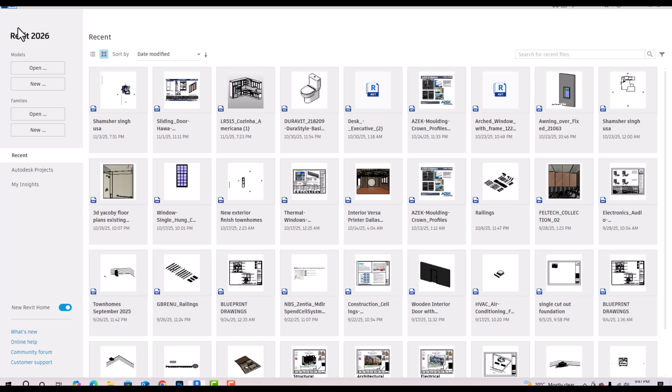So I'm going to families here and you can click open, and I'm going to select English Imperial since I'm using feet and inches. If you are using meters, you can go for English metric. So I'm going to furniture category here, and I'm going to select furniture.rft. I'm going to open this.

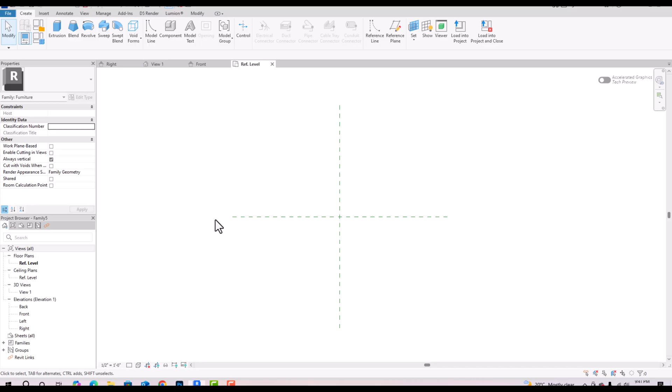This is the floor plan reference level. I need to create a reference plane here, so I'm going to select this, or you can type shortcut command RP. And now I'm going to draw another line here. So this is 2 feet 2 inches, so I'm going to make this as 2 feet. Draw a reference line here and another reference line here.

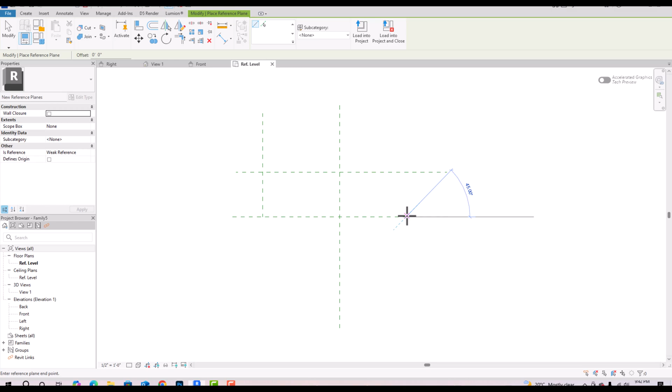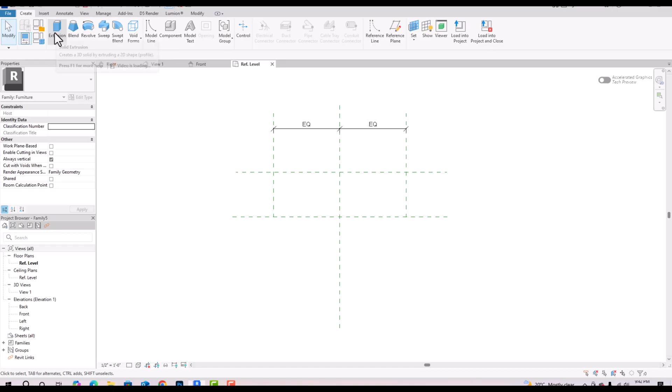So you can take a measurement here, so you can use the annotate tab here, and I'm going to select this one and this one. And I'm going to make this as equal, so these all are equal here. So now this is our reference plane, and I'm going to create an extrusion. So I'm going to click on this extrusion, and I'm going to draw a base here.

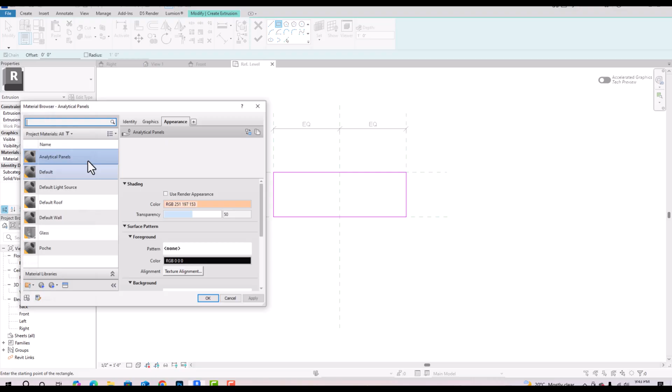So you can see this is our extrusion height, and I'm going to make this as, suppose, 7 feet here, and material you can change here. So it is recommended you create a material for this, and I'm going to create a default new material, rename this as wood finish.

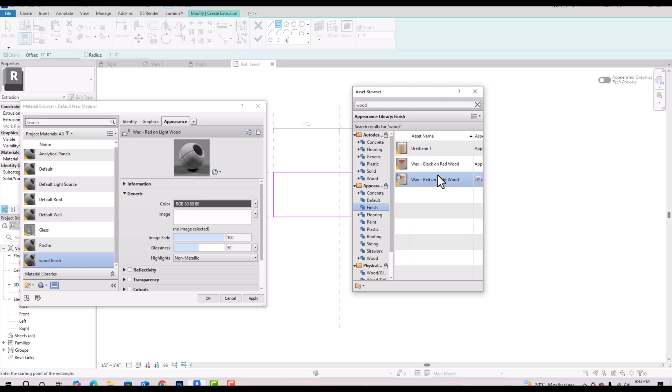So we can use any material here. So I'm going to give this as a wood finish, so we can select any wood here. So I'm going to select this finish here, and I'm going to select this wax light wood, and I'm going to apply OK. And now I can finish this here, and I'm going to front here.

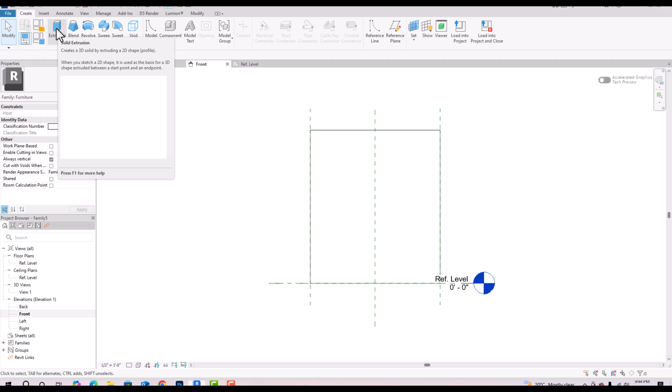So this is our wardrobe here, and now I'm going to draw another extrusion here to create doors. So this is another door frame. So I'm going to create extrusion, and now you can select this extrusion here, and you can use a rectangle here, and you can draw some extrusion here.

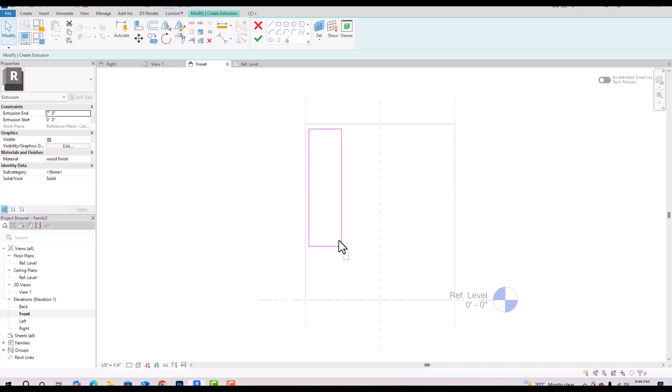This is just to make you understand. So I want to create 2 frames here, and can take this as 1 feet 4, and you can copy this here. So now I want to make a glass, so I'm going to finish this, and you can make this as 1 inch.

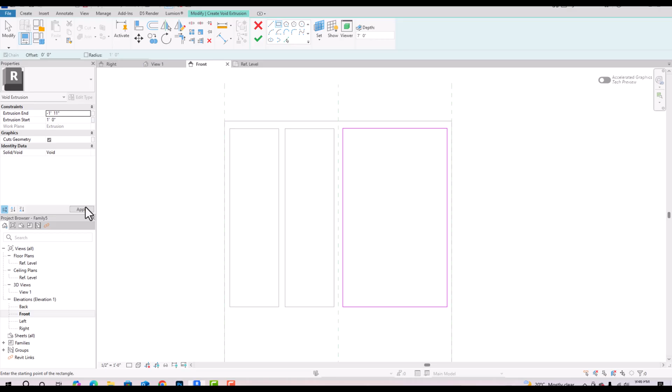And now I'm going to create void forms, void by extrusion, and now can select a plane here, and now I'm going to select void by extrusion. So I'm going to take this as 1 inch 1 feet, and I'm going to take this as minus 1 feet 11, void, apply, finish this.

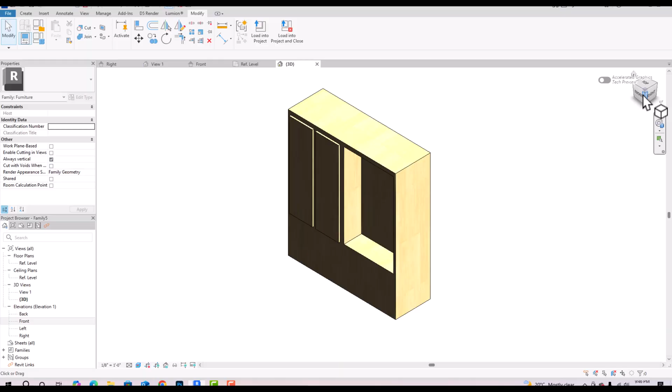And can use cut geometry tool here, cut geometry. So I'm going to select this one, and now I'm going to select this one, and we'll see in 3D. So this is the extrusion we have created. So now you can create a glass material here.

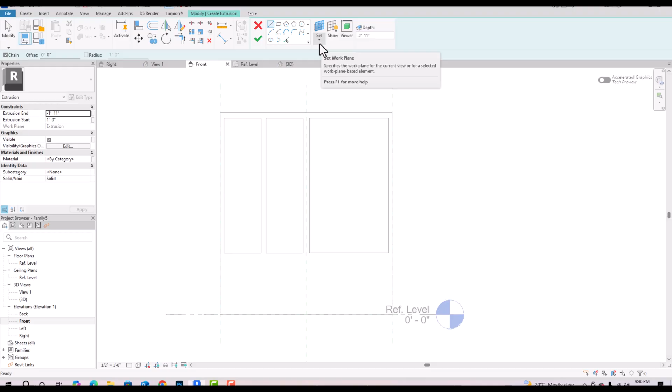So I'm going to my front here, and now I'm going to create another extrusion here, and I'm going to pick a plane here, and I'm going to pick up this plane, and I'm going to create a glass here. So now I'm going to use this as 0, and I'm going to give the glass thickness as minus 1/8 inches, suppose. And you can also change the material here.

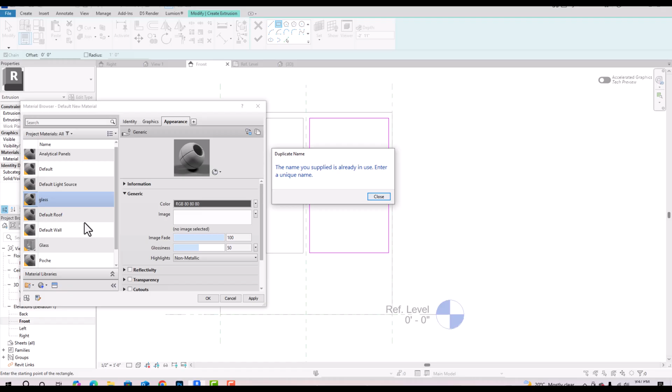So I'm going to create a new material here, and I'm going to rename this as glass, and it already exists, so then I'm going to rename this glass 1, and I'm going to search for glass material here.

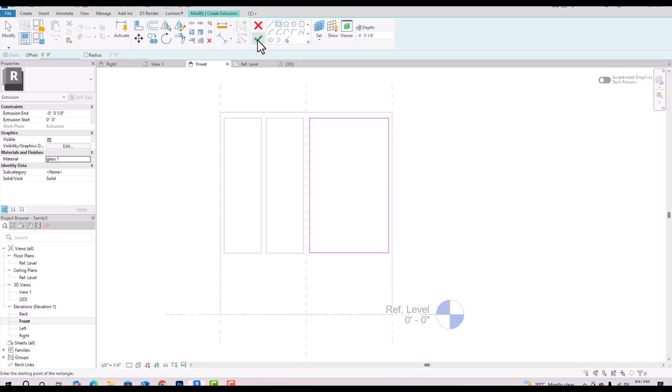So I'm going to select this blue glazing, and I will click apply, OK, and now we can apply this material here, and we'll see in 3D view. So this is our glass frame. So this is created here.

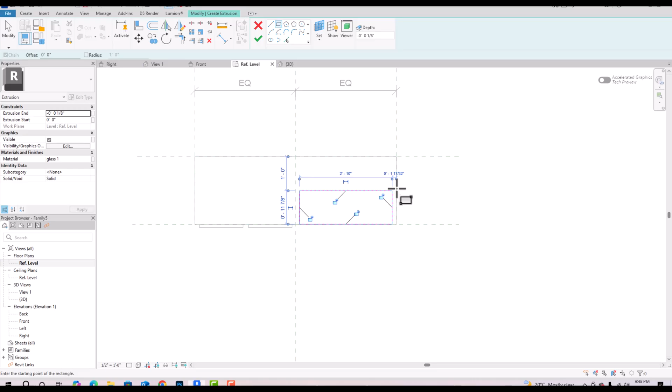So I want to create some racks. So now what I will do, I will go to my reference level here, and in this I'm going to create a rack here. So I'm going to select this, and I'm going to draw to the width of this glass opening here. So now what I will do, I will just give a thickness of 1/8 inches. So I will start extrusion from 3 feet 6 inches.

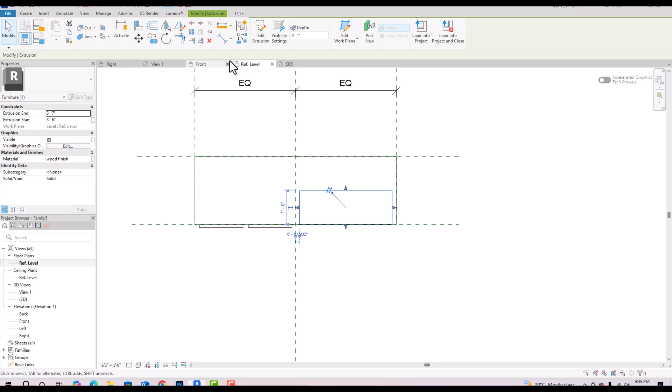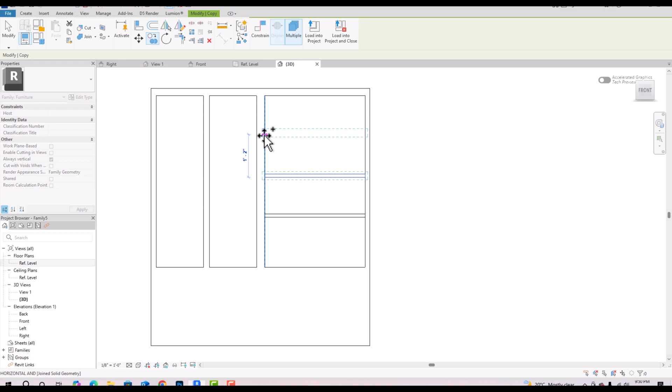This is 3 inches. So I'm going to make this as 3 feet 7. Apply. Then again you can check here. So now this is okay, and you have to select wireframe here. So I'm going to front mode here, and I will keep copying here. So I will remove this constraint, and we'll make some racks here. So we can make them equal size or depending on your design.

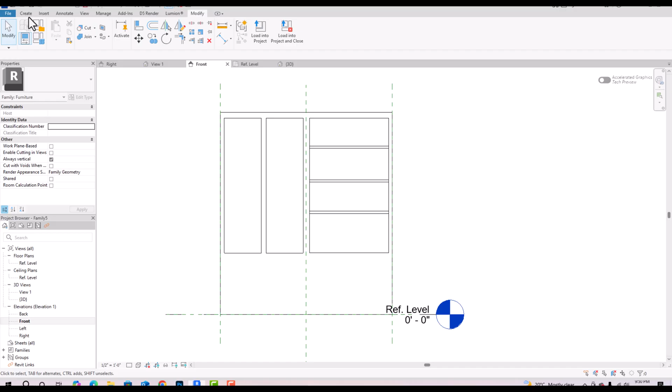So now this is our racks with glass, and we can draw some drawers here. So for this you can go to front, or you can do it in 3D also. So I'm going to front, and I'm going to create some extrusion here. So I'm going to select this plane here. So I'm going to draw some drawers here.

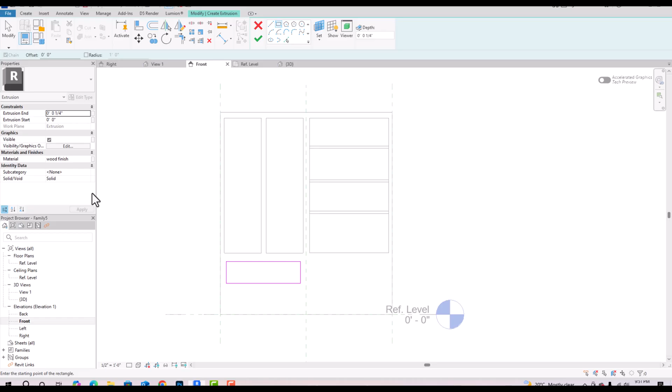So this is our drawer. So I'm going to start from 0, and I'm going to make this as 1/4 inches, and you can give this a wood finish, or you can apply some other material here.

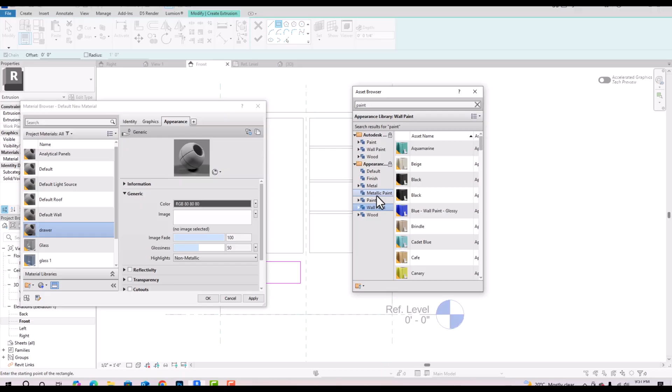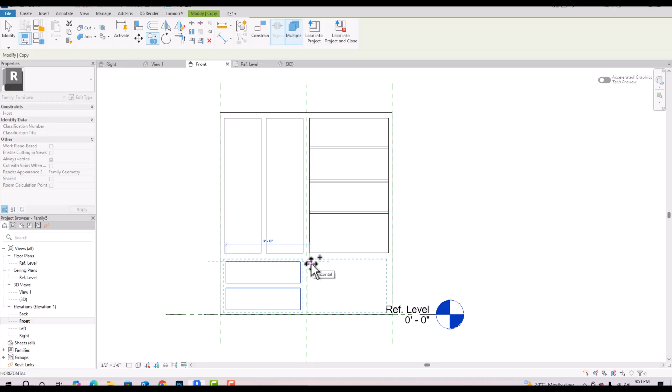So I'm going to create a new material here, and I'm going to rename this as drawer, and I'm going to paint, and I'm going to select paint here, and I'm going to select white color here, select this one, and I'm going to apply here, and we'll copy this drawer here, and these two to the right side. So now we'll check in 3D.

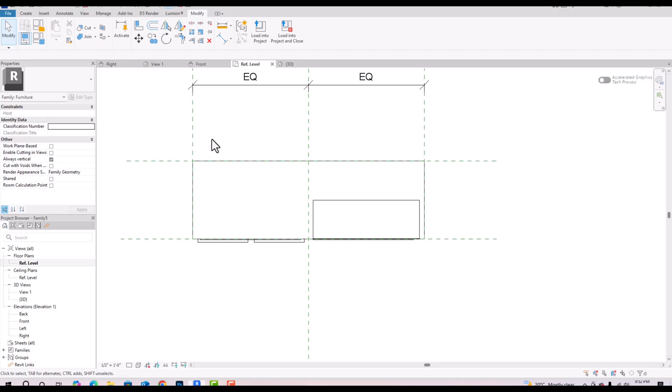So now this is our drawer, it's drawn here, and now we need to draw some knobs. You can download this, or you can do this here. So I'm going to the reference plane level, floor plan, and I'm going to create an extrusion here. So I'm going to draw some drawer knobs here.

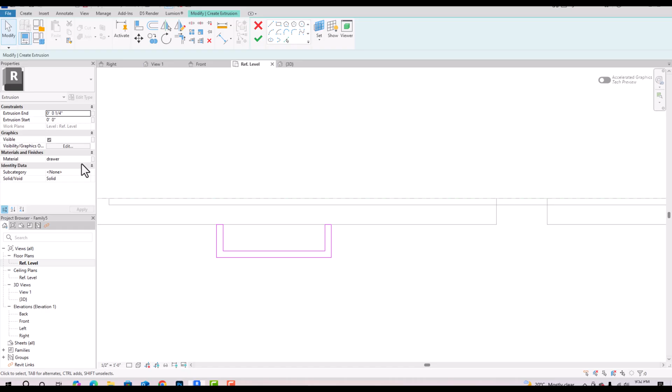So you can take the thickness depending on the dimensions and design your knobs, and you can give this the same thickness and material. I'm going to apply aluminum, and I'm going to rename this as knob here. Or you can call it a handle.

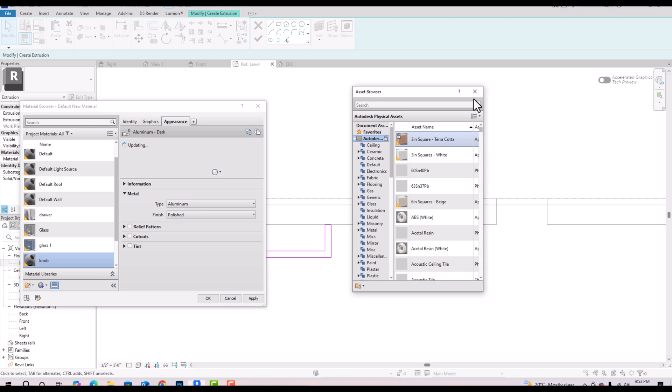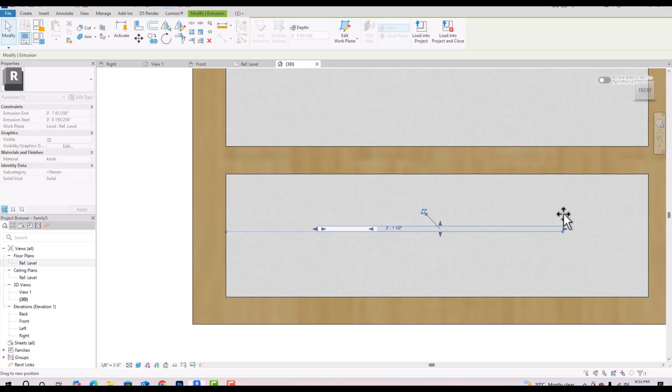So I'm going to apply any material here. So I'm going to apply aluminum. So I'm going to select this one. I'm going to click apply. OK. Finish this, and we'll see here in 3D where it is. So this is here. I'm going to move this here, and you can try to bring this in between.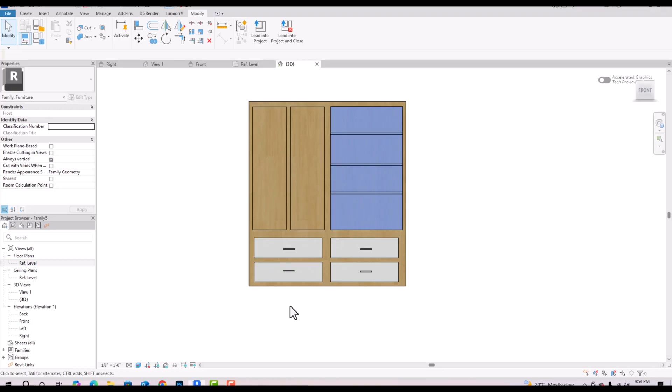So now you can go to front, and you can copy this. You can remove this constraint, and you can copy this here, copy this here, and the same you can do here. So we need to make a handle here. So I'm going to draw some side views. So I can also move this closer.

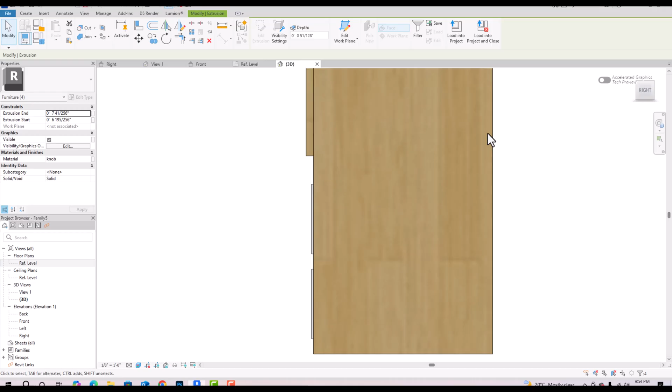So now you can see here all are placed. Draw a handle here, or you can draw some similar shape here. And now we'll see where it is. So you can see here.

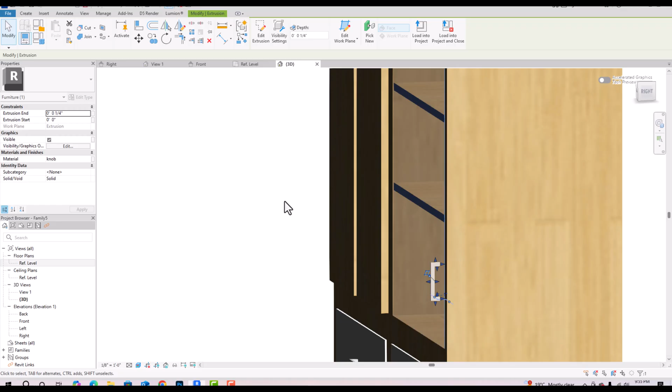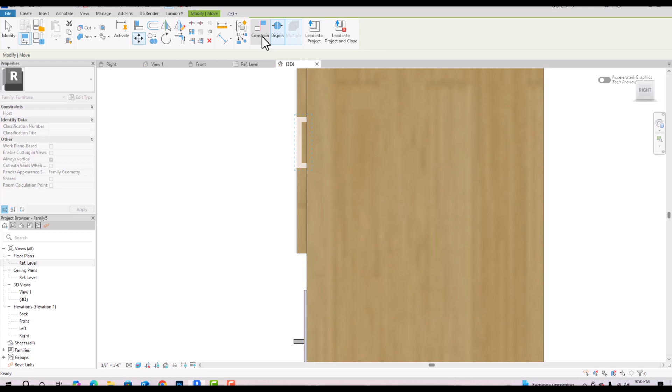I'm going to adjust this. I'm going to select this, and we'll select move here, remove constraint, and I'm going to move here, one here, and now I will copy the same thing here. So you can also make a handle here.

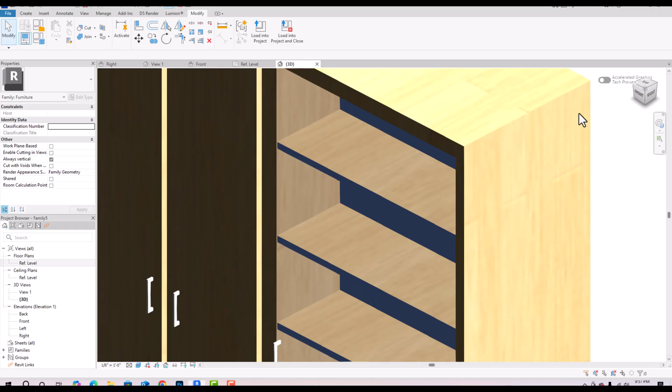So you can see this is the simple crockery unit. You can also ignore this back face. So this is just to avoid parametric, and you can quickly draw some glass cabinets or wardrobes like this. So this was the tutorial for today's session.